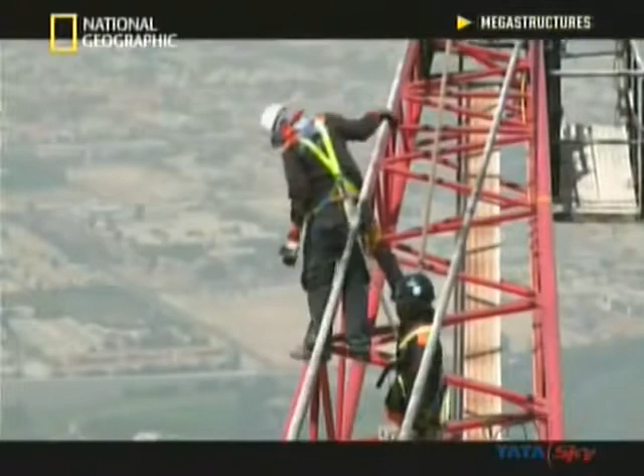The Burj Khalifa in Dubai is the tallest man-made feature on the face of the planet, and one of the greatest achievements in engineering history. To dream it up took outrageous ambition. To put it together requires nerves of steel.

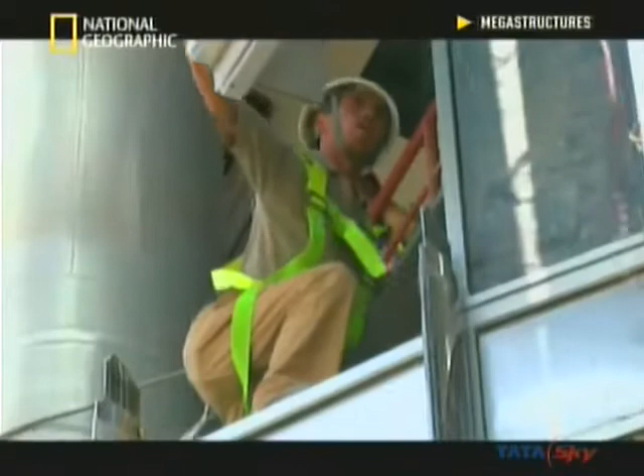Constructing cranes taller. Installing windows higher. Up! And building bigger than ever before. The immediate reaction was, "Are you crazy?" As the construction team makes history, they film it themselves. This is the story of one incredible skyscraper, and the people risking their reputations and their lives to build it. All these people that are underneath this are at risk.

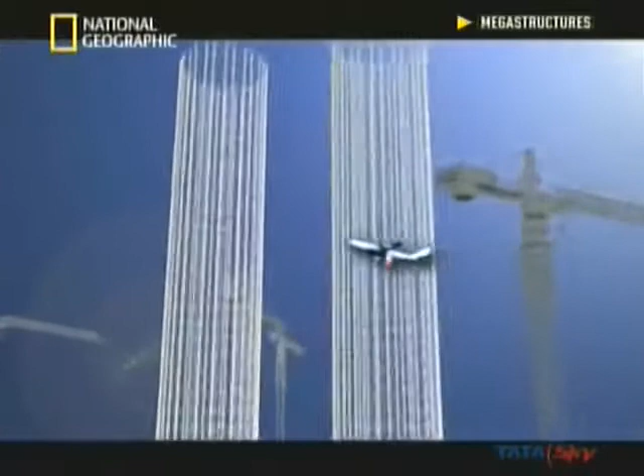In the Middle Eastern Emirate of Dubai stands an architectural giant. At 828 meters high, the Burj Khalifa is the tallest building on Earth. This $1.5 billion tower opened in 2010 with one of the most spectacular fireworks displays ever seen. But this patch of land once looked very different. 6 years earlier, when construction started, it was little more than a barren, parched, and sun-baked desert.

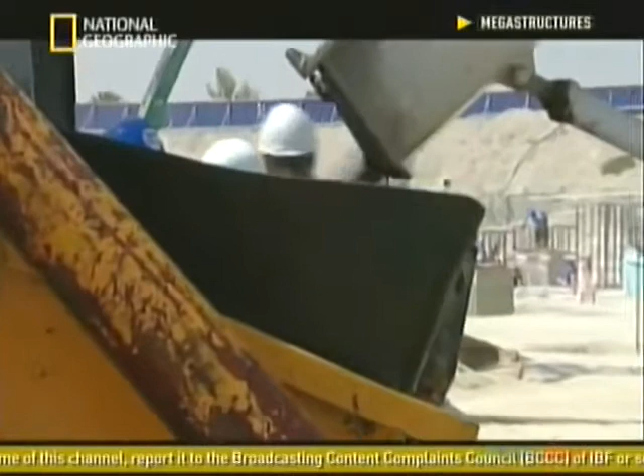In February 2004, the team breaks ground at the Burj site. When you build this big, speed is of the essence. Time is money. There's so much money invested in these buildings, you have to finish them and start recouping your investment. Construction manager David Bradford is the man responsible for getting the job done on time.

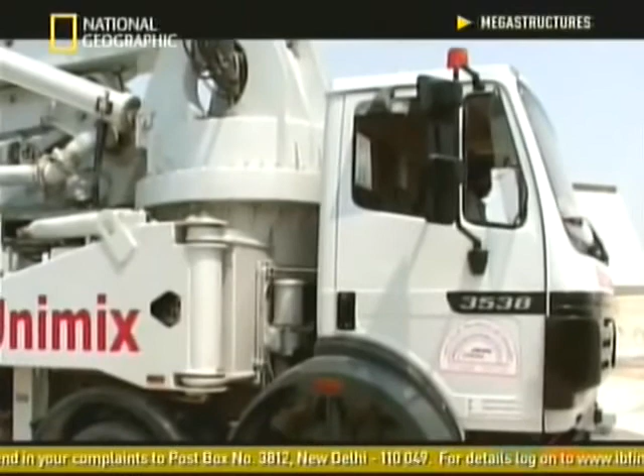So I was ecstatic, just to get a job like this. It's like a dream come true. This is the biggest building in the world. How many people get an opportunity to work on a job like this?

But as David starts work, the architects are still finalizing the tower's complex design. The way you build a building like this, you have to fast-track it. So you can't wait until you get all the design in place. You'll be sitting there in your office for 3 years trying to get the design finished before you can tender it. With large parts of the structure still on the drawing board, the construction team heads into the sky.

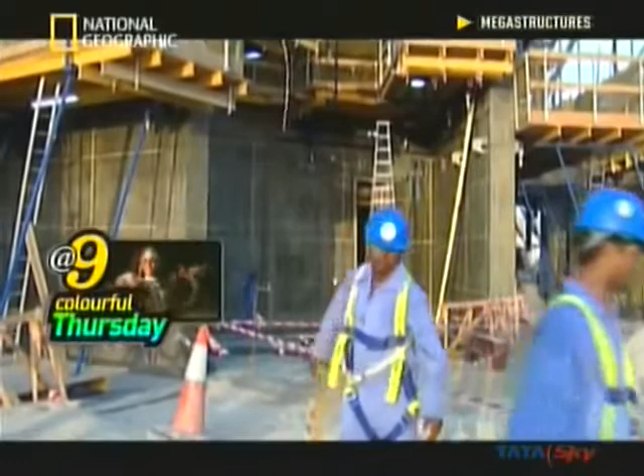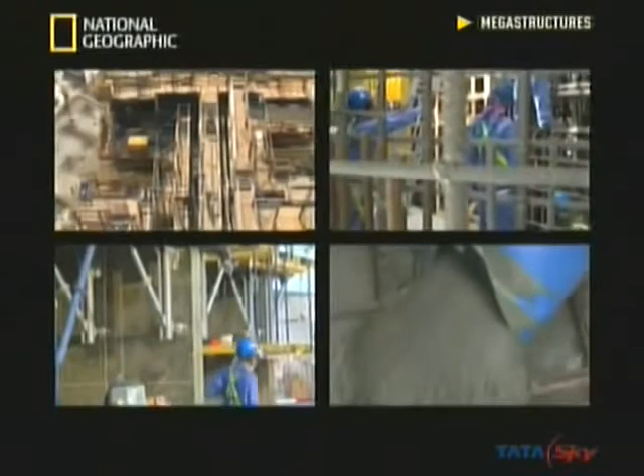The fastest way to build a tower like the Burj is with reinforced concrete, using a process called jump forming. The team builds molds at the base. They insert steel reinforcement bars and pour in concrete. Then when the concrete sets, the team lifts the molds up to the next level. And the process starts again. Using this system, the building begins growing at the pace of one new floor every week.

When you set the jump form up like this, you put the rebar in, you pour the concrete in the top. After 12 hours, this is 12 hours after you place the concrete, which is liquid, you pull the forms back and you actually climb the hydraulic jump form system up on the concrete that was previously poured. And then that climbs up automatically 4 meters at a time.

The Burj Khalifa is the brainchild of Dubai property developer Emaar. They want to proclaim the city's growing status as a global financial center by building the world's tallest tower. So Emaar has called in one of America's top architecture firms, Skidmore, Owings and Merrill. SOM is based in Chicago, the home of the skyscraper.

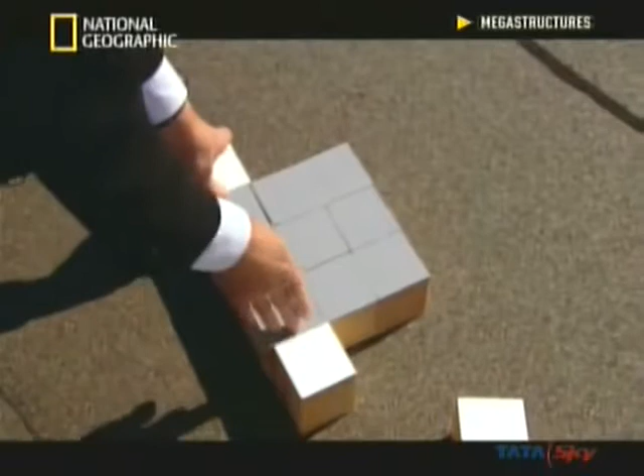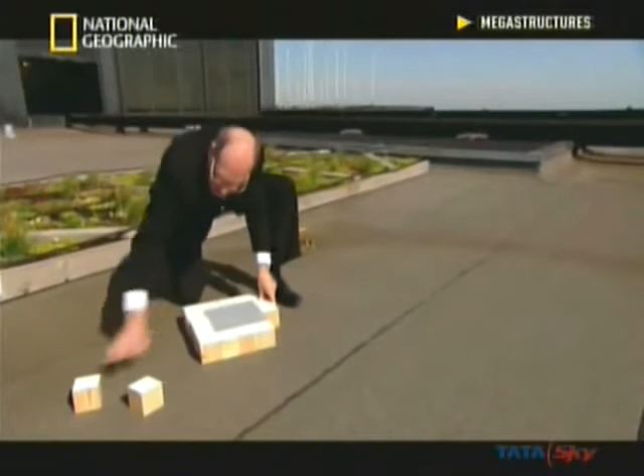Well, you got to make the footprint bigger. But as we do this, we've gone from something that was 3 wide to something that's 5 wide. So you have a huge amount of area, which is difficult to market. And what's more important is that the space becomes very, very deep. In buildings, you want to have views. You want to be able to see out the window. And you can see your occupants would be so far from the views from the skin as to render the building unusable.

To create a taller tower with bright internal spaces, Bill and his team devise a new structural system. The structural system we use for the Burj Khalifa is the buttressed core. Now the core is the center hexagon in the middle of the building, and that's what's used to resist the twisting forces on the building, okay? But it's much too slender to go to such great heights. So it needs to be buttressed.

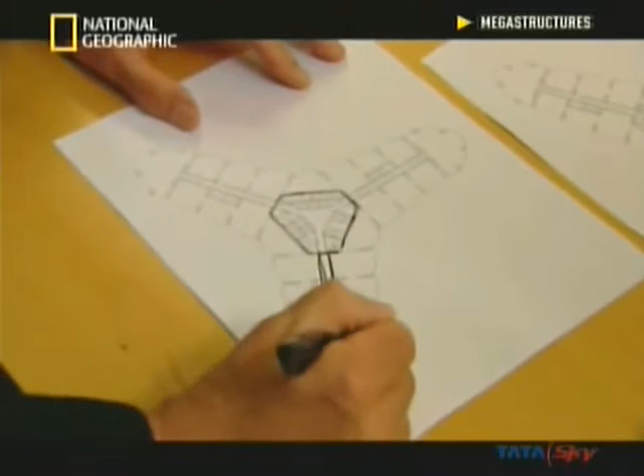Now the buttresses are the three wings that come off. It's consisting of these walls that go down the corridors. So you can see how this core has been buttressed in three directions. That's why the structure goes down the wings. To my knowledge, it's never been done anywhere else. And so it's a unique solution to a very interesting problem.

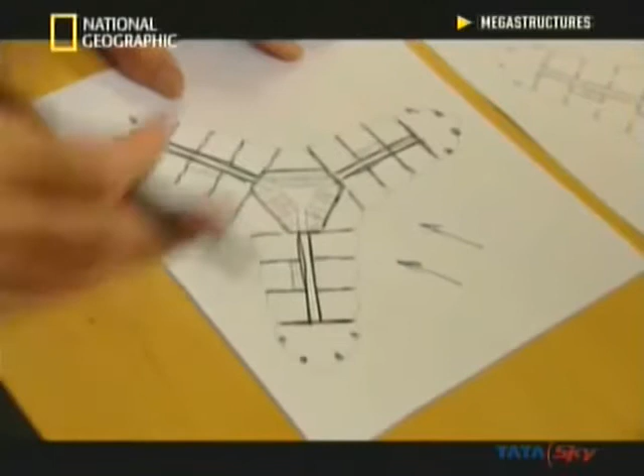With the buttressed core concept, natural light floods the interior. We've come up with a solution which allows us to go very, very tall, but it's light and airy on the inside. It's as if you're in a 10-story building rather than a 160-story building. In SOM's design, the large tower base helps support the huge weight of steel and concrete. Then, as the building climbs, the buttresses step back in a rising spiral.

The team then coats the design in glistening mirrored glass to reflect the desert heat and light. If you were to compare the Burj to an automobile, you'd be talking about Lamborghinis or Ferraris. It's all about performance, and this building is at the highest level of performance. This quality comes at a price.

The building cost was a closely guarded secret. We heard some general figures that were thrown out. We guessed that it was somewhere in the $1.5 billion range, but we weren't privy to a lot of that information. And again, I think the jury's still out. Making this billion-dollar design a reality will be a mammoth task.

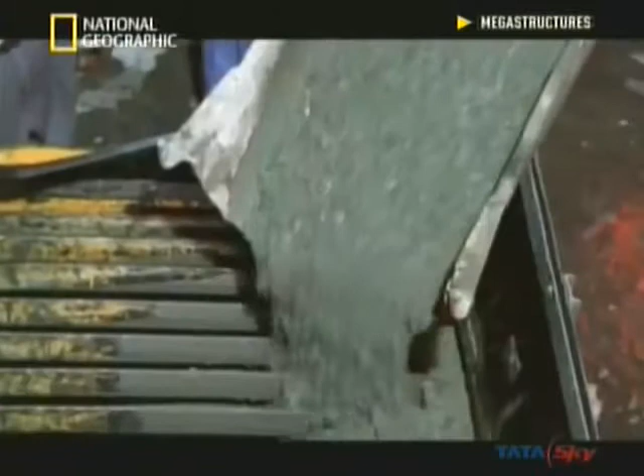The most basic construction materials must be super-powered. Strength of concrete was key here, absolutely key. And we produced concrete here that nobody produced anywhere else. The team uses over 25 separate ingredients to create concrete that stays liquid as it's pumped up the building and then turns solid extremely fast.

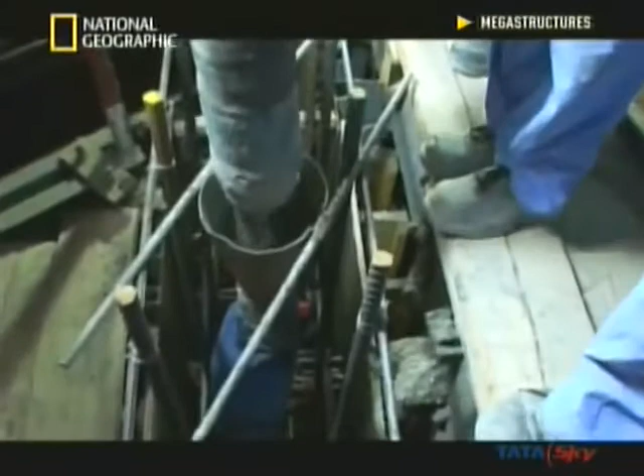But getting this special mix to set is a massive challenge in Dubai, with temperatures rising over 45 degrees Celsius. If the concrete is too hot, it'll set instantaneously and you can't even place it. You have to pour at night when the temperatures are lower, and you have to put in ice and chilled water in the concrete mix.

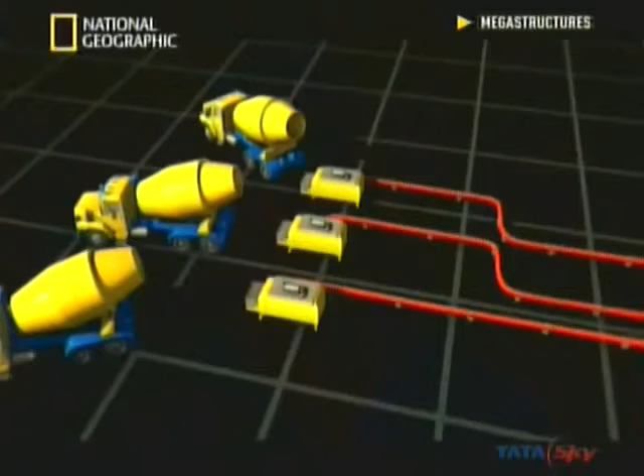To lift this mix up the building, the construction team uses three of the world's most powerful concrete pumps. Over 32 months, the pumps deliver 165,000 cubic meters of concrete, enough to lay a sidewalk 880 kilometers long. The team will then top the concrete tower with structural steel. And as this building rockets out of the desert, men and machinery will go to greater heights than ever seen before. Okay, over the edge.

The city of Dubai is home to 17 of the 100 highest skyscrapers on Earth. But they're about to be dwarfed by a monster. As construction accelerates, the Burj Khalifa is now growing a new floor every three days. The idea is keep the ball rolling, never stop construction at any point in the project until you're finished. The building's handed over, that's it. That's when you can relax.

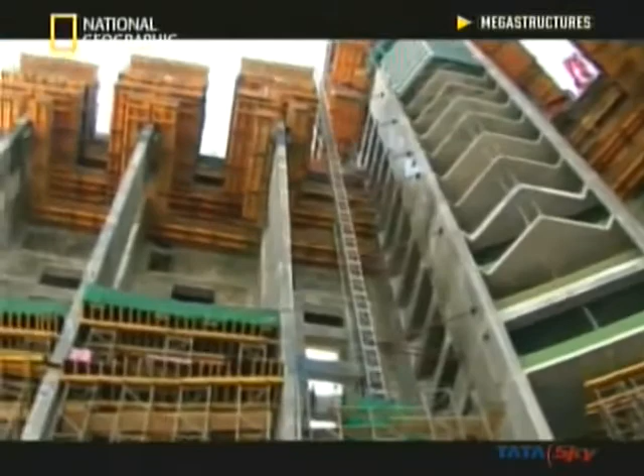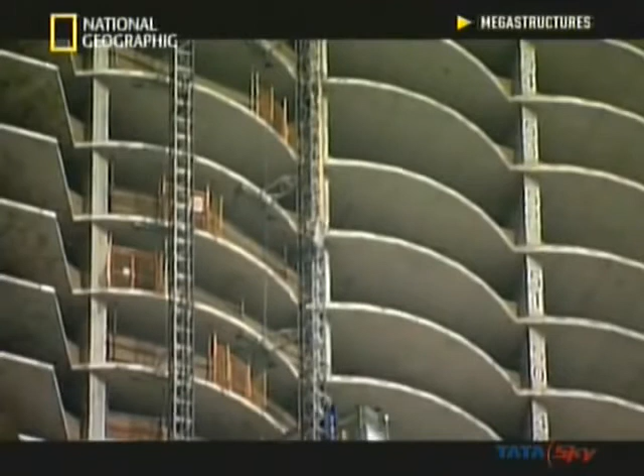While this process continues, there is still one fundamental detail to resolve. The architects still haven't decided on the building's final height. Usually minor things change, and on this one, major things changed. The foundations went in way before we figured out the final height of this building. It's an issue that has to be cleared up, fast.

The landmark to beat is the 508-meter tall Taipei 101 in Taiwan. SOM's original design is just 10 meters higher. And one of the reasons why we did that is we didn't want to promise more than we knew we could deliver. But the architects soon calculate that the structure is so strong, it could stand over 300 meters taller.

We kept on making the building taller and taller. And so it actually grew to about 725 meters there for a while. It stayed there for a while, then eventually grew up to around 800 meters and finally ended up at the 828 meter height.

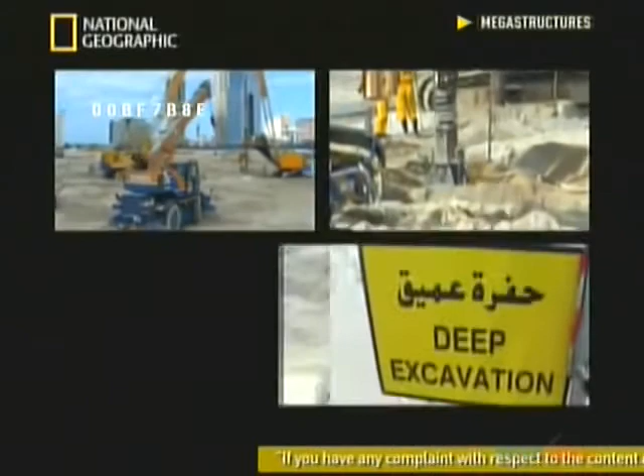When complete, the Burj will stand 828 meters above the ground. The question is, are the foundations strong enough to hold it up? Early on in construction, analysis of the ground under the site highlighted a problem.

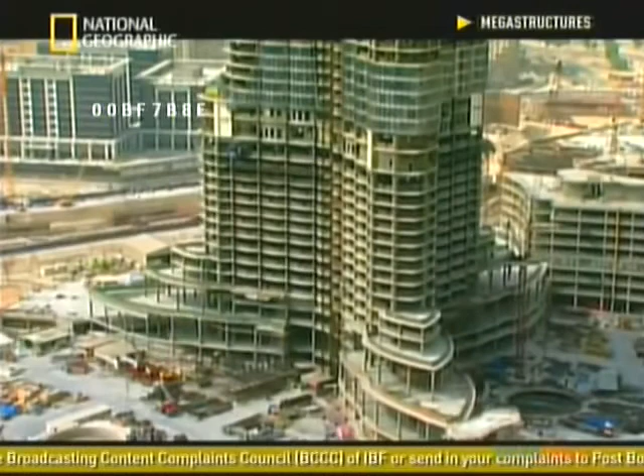It's not like when I worked in New York City, you get good granite there. You go down 4 or 5 meters, you're into good granite, and that's what you sit your foundation on, the granite itself. Here the ground is a top layer of sand, 3 or 4 meters of sand, and you get into weak sandstones, weak limestones, nothing very good.

But science provides the answer. The future of the Burj Khalifa and its entire colossal weight rests on one scientific principle: friction. There's basically 2 methods in piling. One is end-bearing piles, which is you put the pile directly on the hard rock. That's what can sustain the load.

But here we went with skin friction piles, where the weight of the tower is carried on the friction of the pile, the side of the pile. The foundations of the Burj rely on the super strong grip created between the ground and the sides of each pile. Beneath the tower, the team has driven 192 piles to a depth of 50 meters to support a 3.7 meter thick raft of solid concrete.

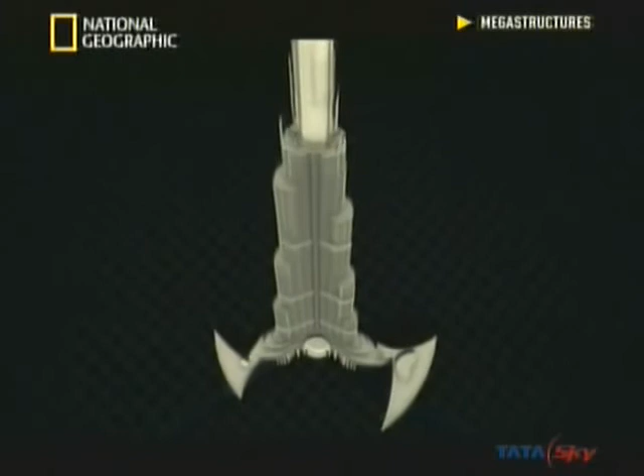These foundations must hold up a building that weighs over 500,000 tons. The numbers are so big that the team has to allow for a small degree of settling in the design. Once we evaluate all the total load of the building, live and dead loads, we expect the foundations to settle about 75 millimeters. But the foundations should hold.

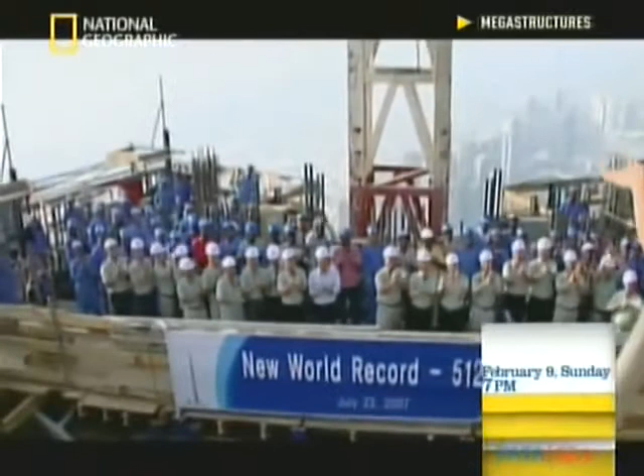3 years after breaking ground, construction reaches 512 meters and 141 floors. The Burj is now the tallest building on Earth. To help move materials, the team hires 3 of the biggest construction cranes in the world. I mean, these are very specialist cranes, actually huge. They weigh 120 tons dead weight. That's the crane itself, without anything on the hook.

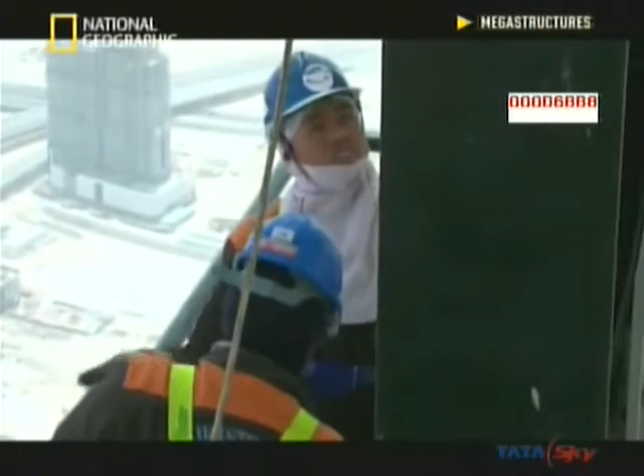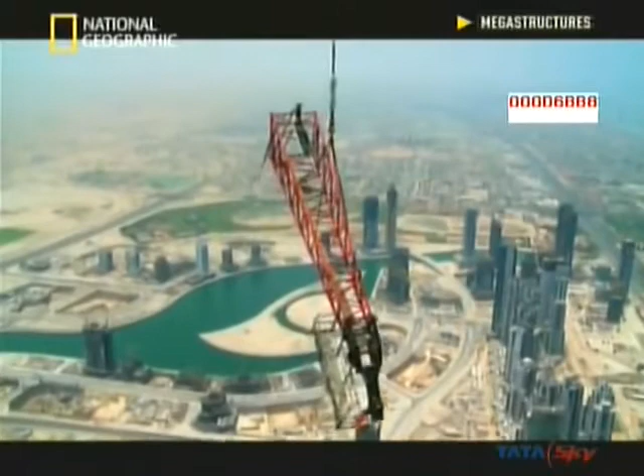The high-wire act of installing the cranes falls to a special group of men: Sharif and his team of crane riggers. These men come from every part of the globe, and many speak different languages. But they have 2 things in common: a strong nerve and an incredible head for heights. Their task is to erect the cranes and keep them working smoothly, all without a single slip.

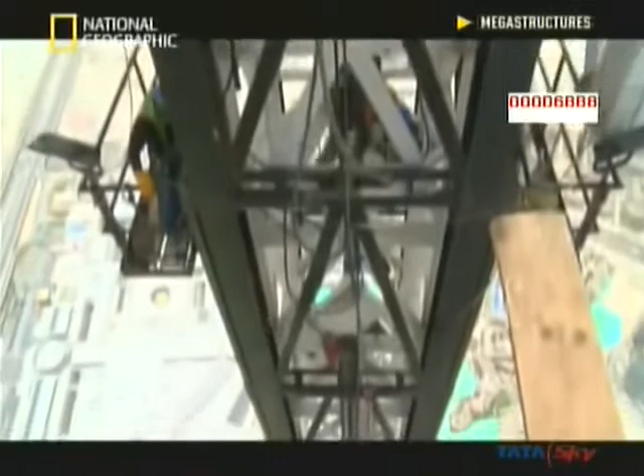They never ever lost sight of the ground and the edge of the building, and it was amazing that these people were so comfortable. The cranes contain an ingenious self-jacking mechanism, so they can grow alongside the rising building. As every new floor is completed, Sharif and his team add another section to the tower support and lift each crane even higher.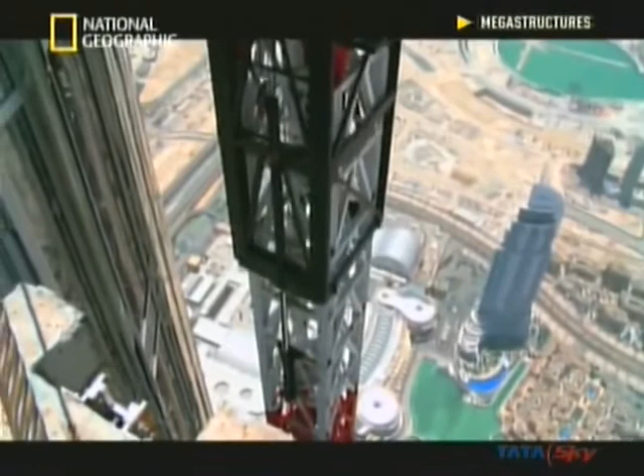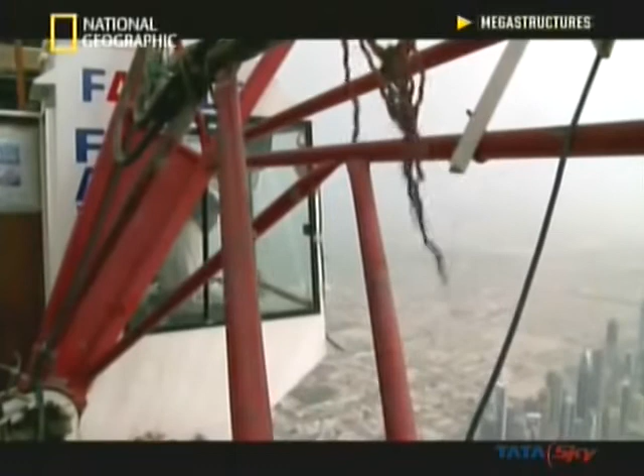You need a steady hand to operate the highest construction crane in the world. And one of the few trusted with the task is Mohammed from Pakistan. I'm on duty for 12 hours, from 7 in the morning until 7 in the evening. There was a myth going around that the crane operator lived in the cabin, but I think the cabins are too cramped and uncomfortable. At 700 meters up in the air, Mohammed's crane cab is nearly twice as high as the Empire State Building.

I like heights. They're great for work. If I need to go higher, that's fine. Whatever the height is, God willing, I'll do it. As the Burj reaches for the sky, it is entering the unknown. And one powerful force is becoming an increasing threat.

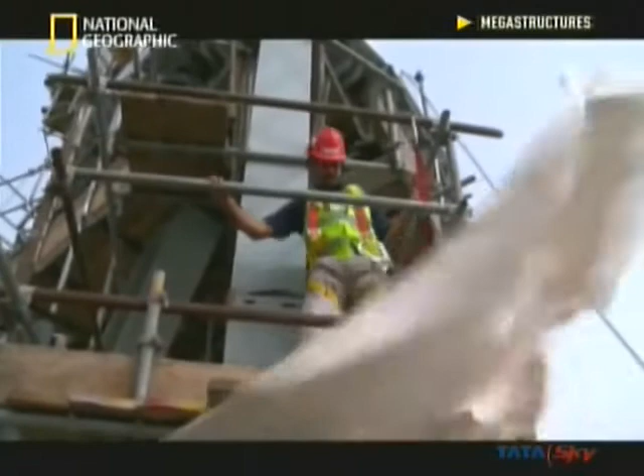The first overarching thing is you have to be respectful of the laws of nature, with gravity, wind, and the sun. And on a super high rise, the most dangerous and unpredictable of these elements is wind. And when you get to these heights, the dominant load is actually wind load.

It's not dead load, which is actually the weight of the structure and the cladding and so forth. It's not live load, which is the people in the building. That's fairly small. It's actually wind load. You get the wind blowing on the side of the tower, and of course it tends to bend the tower or try to push it over.

No building demonstrates this problem better than the John Hancock Tower in Boston. A masterpiece of steel and glass, 240 meters tall, the Hancock was constructed in the 1970s. But serious problems soon emerged. Even in moderate winds, people inside suffered motion sickness as the building swayed. And over 5,000 glass panels blew out, shattering on the sidewalk below. Only a major redesign saved the tower from demolition.

To prevent the Burj from suffering a similar fate, the team tests the building in a wind tunnel. Peter Irwin is one of the world's top wind engineers. These are various models of different buildings that we've tested in the past. This one here shows some of the unusual shapes that architects are coming up with. That one's being built in China.

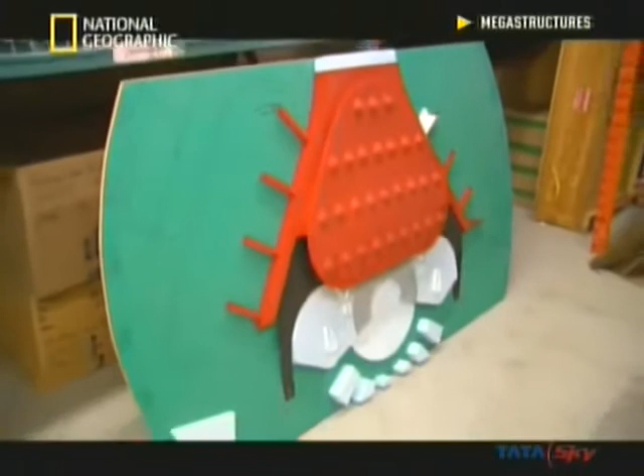When we get involved with a wind engineering project, there are 2 aspects that we need to address. First of all, we need to know what are the winds doing in the area that the building is going to be built. Then we also need to know what is it going to do to the building. Peter and the team calculate that the Burj has to withstand gusts of up to 240 kilometers per hour.

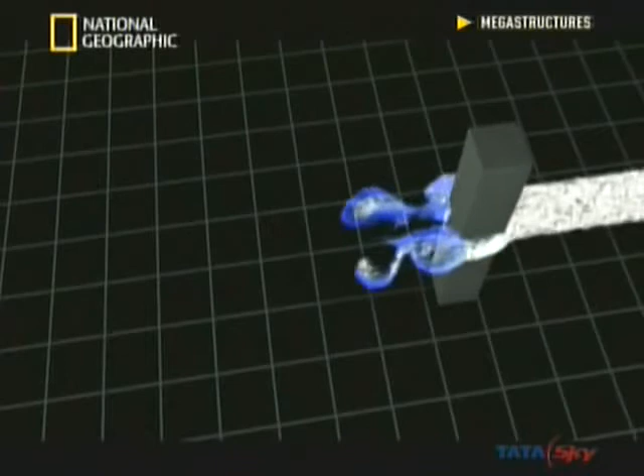But because of its height, this tower faces an added danger. Buildings, as they get taller and more slender, run into a particular phenomenon in wind called vortex shedding. This is a model of a tall building, and the wind is blowing this way. And what happens with a building like this is that you get vortices peeling off this front corner, first off one side and then off the other side. As these whirlwinds peel off each side of a skyscraper, they can pull the building violently from side to side. Peter and the team must make sure that this phenomenon doesn't damage the Burj.

There were 3 aerodynamic improvements that were developed as a result of the wind tunnel test. One of them was to improve the shape of these outer buttresses by softening the corner here. Another one was to reduce the width of the tower higher up. And a third improvement was achieved by reorienting the entire tower relative to the prevailing wind directions. The end result is an incredibly stable building, with a shape that resists vortex shedding. So you might say that this shape confuses the wind and it's unable to create these strong crosswind forces that affect many other buildings. The Burj is equipped to handle the strongest winds that strike Dubai.

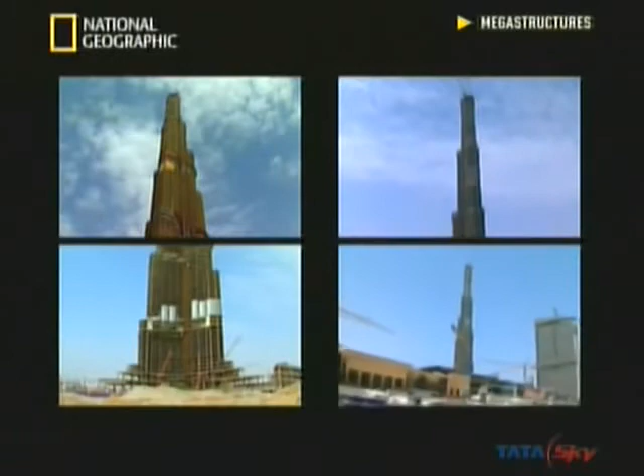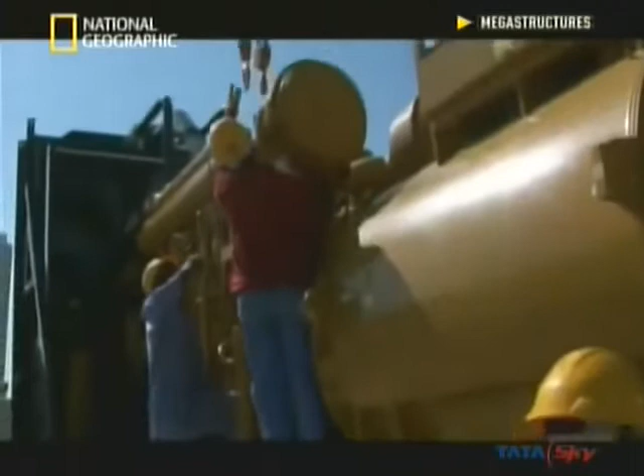On site, the superstructure is shooting upwards. Once completed, the Burj Khalifa will contain 900 apartments, a 160-room hotel, and 37 floors of offices. The building will use up to 36 megawatts of electricity, enough to power a town of 20,000 people. In a power outage, 5 huge generators will supply backup electricity. But first, someone has to get these massive machines into position.

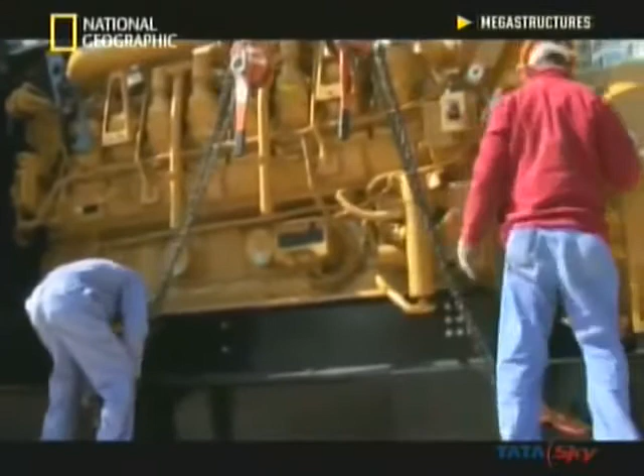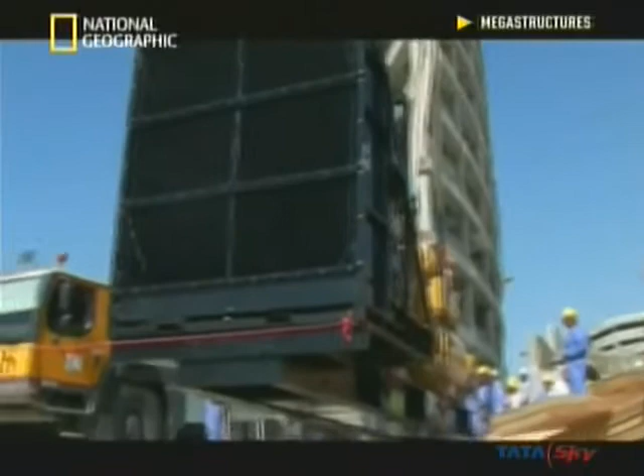3 days before Christmas Day, and look what Santa's brought me. That's a 22-ton generator, and there's 5 of them. Pull it. Gently. Keep your eyes on the machine. What have we got? 26. It's supposed to be 22. Someone, somewhere, has made a critical mistake. Each generator should weigh 22 tons. Why is it 26 tons?

You're amazing. Amazing. Everything is rated below 25 tons. The spreader beam is rated until 25 tons. All these slings, they're 6 tons each, that's 24 tons, and we're trying to lift 26 tons. Therefore, all these people that are underneath this are at risk. Why is that? Right now, my people are at risk. Yes. It's 26 tons. The generator is 4 tons too heavy, and the chains could snap at any moment.

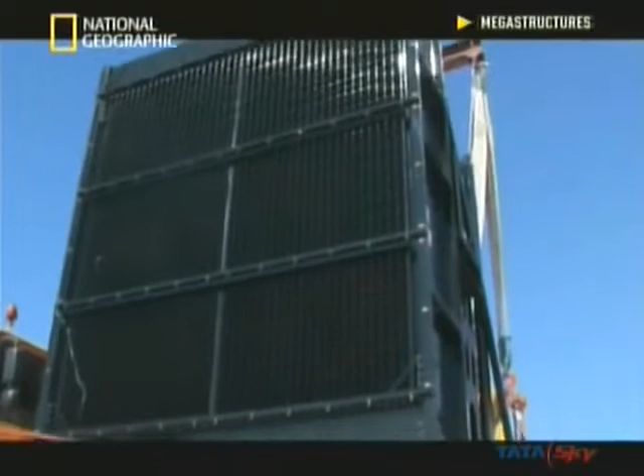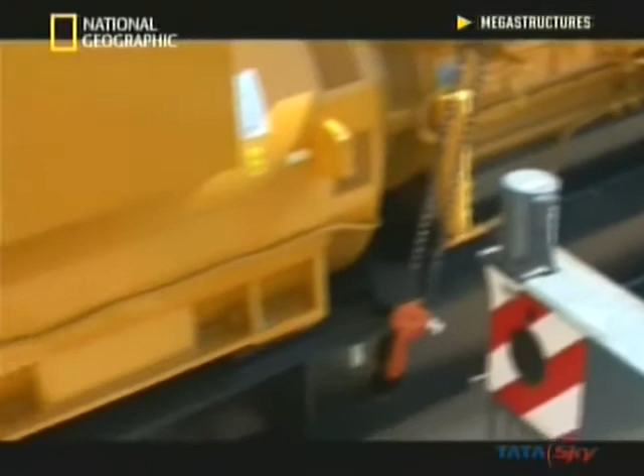Put it down. These things are not an exact science. It's experience, and I'd sooner not risk the lives of men or machines. When you're building on this scale, safety is paramount. The team must reinforce the lifting gear before moving the generators into the building. You go downside, huh?

As work progresses, the task of keeping everything on schedule is taking its toll on David Bradford. I went all out here to produce the best job possible. That had an impact, obviously, on my family life. My wife didn't see me, although she didn't complain about it, but I'd show up home and my wife had already gone to bed, and I'd be out in the morning before she got up. But the job's just about to get even tougher.

It's kind of a building you can't afford to make mistakes. Okay. That's the bottom line. You make a mistake, the building stops, then everybody incurs huge costs. The contractor's got all his plant and equipment lying idle. He's got thousands of workmen out of work, basically. Can't afford mistakes. You have to check, double check. Everything has to be more or less perfect, all the way up the building. And with the superstructure almost done, one thing is less than perfect. The glass panels that should already cover most of the building are still nowhere in sight.

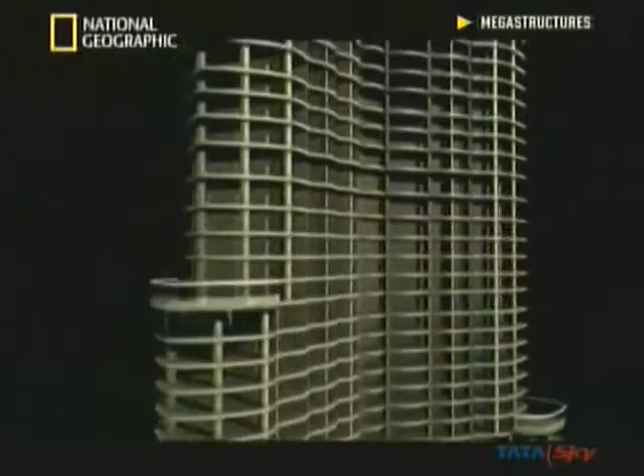As the finished shape of the Burj Khalifa begins to emerge from Dubai's desert haze, the team urgently needs to start cladding the building in its steel and glass facade. As the construction drives upward, you need the cladding to enclose the building, create an interior environment where you can actually work inside and do fit out and mechanical work. All the kinds of things that make the building habitable need an enclosure. It is a massive task to seal the structure from wind, rain and sand.

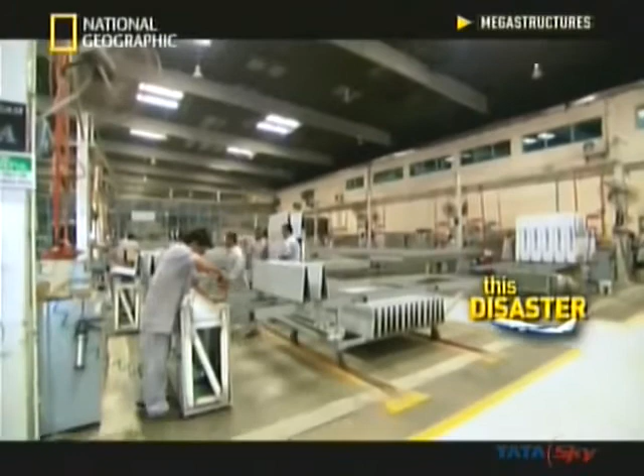24,348 individual panels must be assembled and installed on the exterior. But the company commissioned to supply the panels has gone bust. Now the building is in danger of going over schedule and over budget. Every idle day, every decision that is not made, costs somebody a lot of money. Local contractor Arabian Aluminium brings a new panel supplier on board. And they track down a problem solver to kick-start the operation.

I hopped on a plane, arrived in Dubai for the interview and was taken to the job site. And he said, well, this is the job and this is what you're going to be doing. And I looked up and I said, wow. He goes, yeah, it's not even halfway there. So big surprise. And I said, well, where's the windows? He said, well, this is a problem. There is no curtain walling. There's no design. We don't have a system. I said, well, this is a job for me then. I can fix this problem.

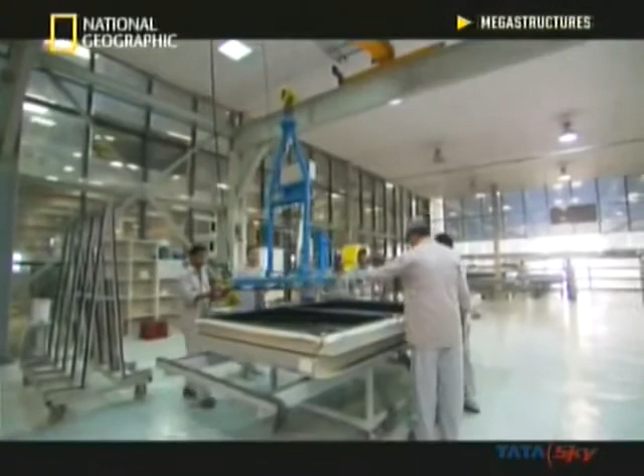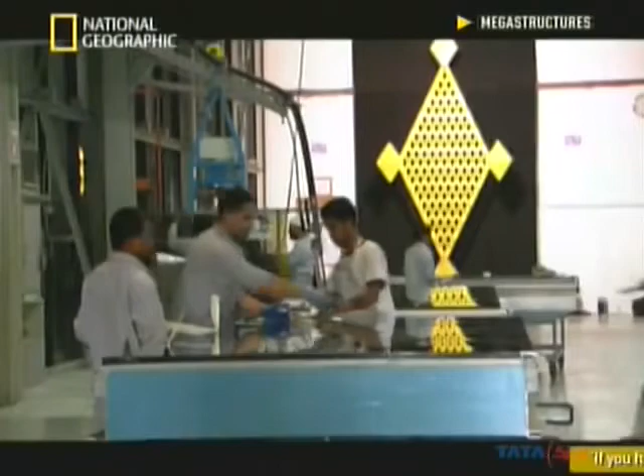Construction of the facade is now 18 months behind schedule. To put the build back on track, John Zarafa helped set up a brand new factory devoted entirely to the Burj. I thought, yeah, it's going to be difficult, but it's a challenge. We were fairly amazed because they went from appointment of their new contract through design, through production of the components and ready for testing in a space of 4 months.

This is a typical panel that was used on the Burj, basically with a big piece of vision glass, small vision glass, stainless steel spandrel, vertical bullnose. It's a stainless steel fin, it's mirror finish, which at the moment has got protection on it, which will eventually get taken off. These panels are literally lifted up as a complete unit and they're hung. That's why they call it a curtain wall. It's actually hanging from the slab above.

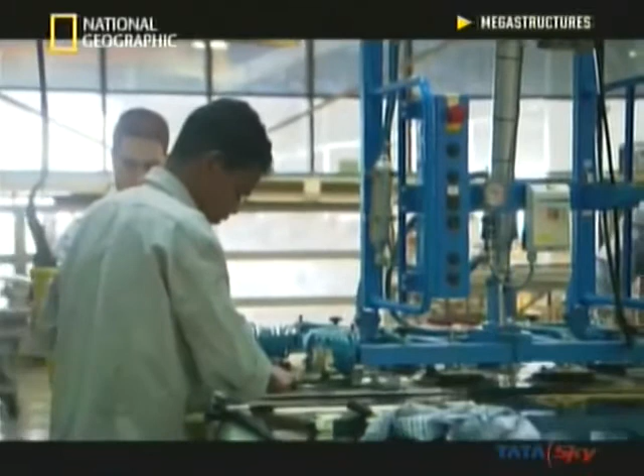Covering buildings in glass might look good, but in Dubai, this creates a special challenge, as John demonstrates. We've got a piece of clear glass here, just normal glass. The sensors are measuring the temperature in the box to understand how much heat is transferring through the glass and into the box. So if this was on the building, this is the amount of heat that would transfer through the glass and into the building. The outside temperature is now reading 46 degrees Celsius, which is very, very hot. As you can see, we're having a bit of a sweat.

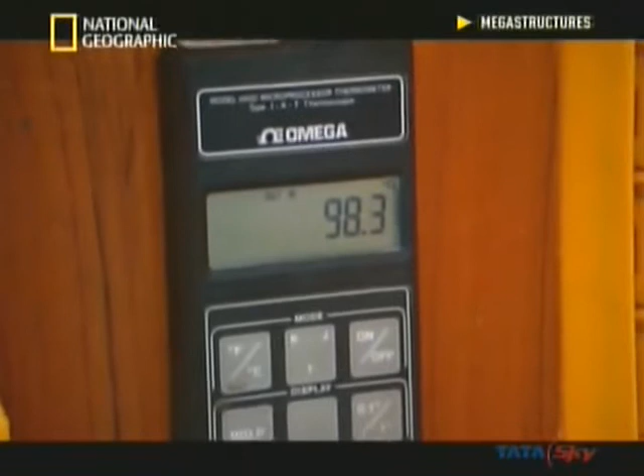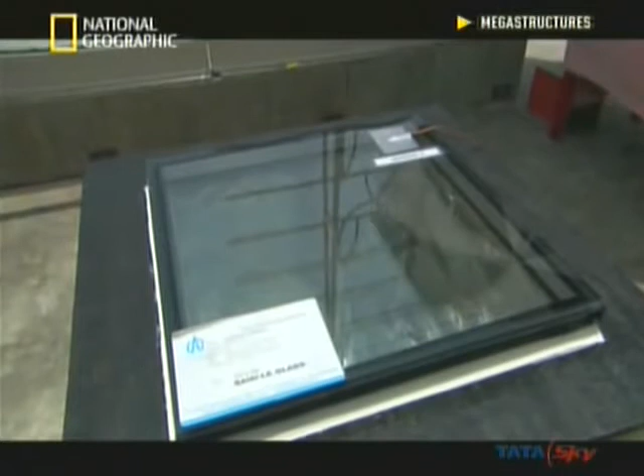46 degrees Celsius is high, but that's nothing compared to the temperature under the glass. The current temperature inside the clear glass box is reading 98 degrees Celsius, so not too many human beings that I know could actually live in this environment. The internal temperature is just below boiling point. If this ordinary glass were installed in the Burj, the building's interior could become the world's biggest sauna. But the team has a high-tech solution.

Here we've got the glass for the Burj Khalifa, which has 2 coatings on it. The outside coating is a silver coating, which captures the UV rays and reflects them back out of the building. The inside coating is a titanium coating, which captures the infrared rays. By reflecting infrared and UV rays, the glass drastically reduces the amount of heat that penetrates the building.

But this technology comes at a cost. With everything that is involved with making a panel, to the point of bringing it to the site and installing it, you're probably talking close to $2,000 US a panel, times 24,000 panels, it's a lot of money. So 24,000 times 2,000 is 48 million. As the glass and aluminium arrive in Dubai, factory workers assemble the panels and ship them straight to the building site.

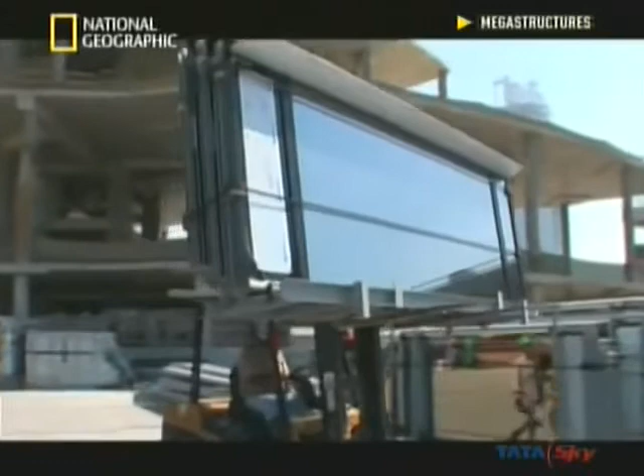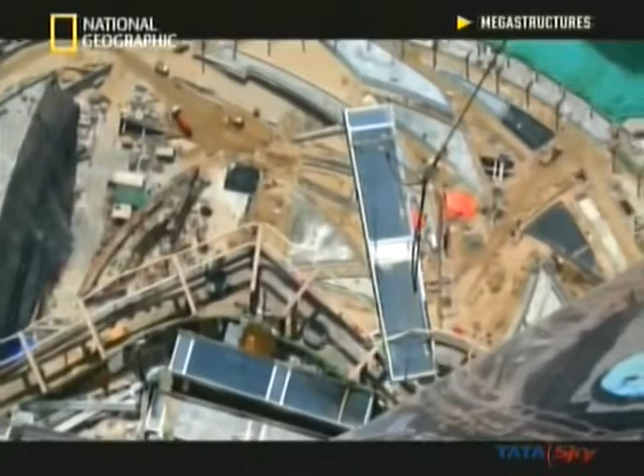The panels are up to 6.4 meters long and weigh up to 750 kilograms. And every single one must be lifted individually and installed by hand. It's very dangerous. You can imagine these panels are quite large, and as soon as the wind grabs them, they're like a big sail, so very difficult to control. The panel could go flying back into the building, the glass would break, and you're going to get a shower of glass coming down the building. A guy could get his legs cut open and stuff like that. It's quite dangerous.

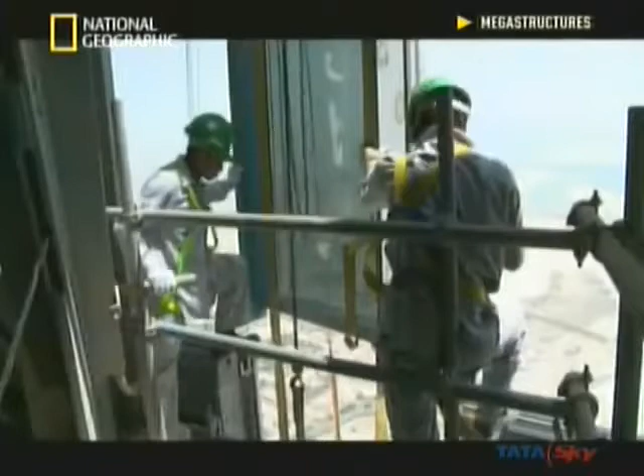As the workmen seal the building, no one is following progress closer than construction manager David Bradford. The major milestone, believe me, I've been working on this thing for a year now. It's been a nightmare. On a Friday, if I wasn't coming into work, I'd set my telescope up on the roof and spy on the cladding contractor and make sure he was working. If he wasn't, I'd give him a telephone call. Yeah, hey, what happened? You know, why aren't you working?

We actually recovered all the time that we needed to get the building back on track, which was really astounding that they were able to do this. The curtain wall is virtually finished. 5 years after breaking ground, the Burj is racing towards completion. On the outside of the building, one of its signature features is taking shape. The highest external balconies in the world.

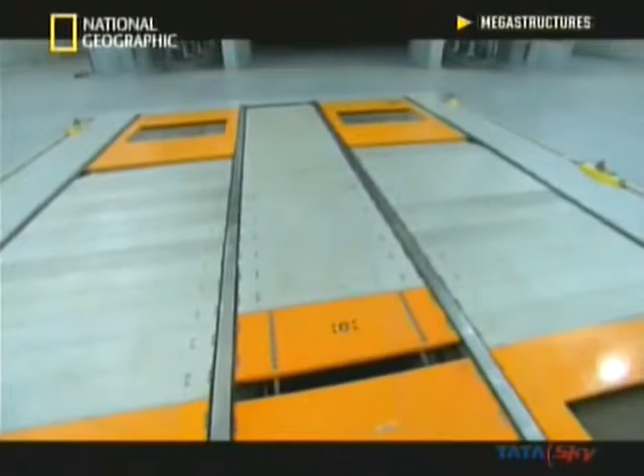It was a client suggestion, and my first thought was, you better bolt down the furniture. We'll head into the main control room. Wind engineer Peter Irwin has a simple way of demonstrating the problem. Using a state-of-the-art wind tunnel at the University of Western Ontario, run by engineer John Comar. The air is streaming through this side. It contracts right through this nozzle in a very uniform fashion and streams right into that corner number 1.

Okay. What we want to do today is to look at the effect of wind on people. We will presumably be able to have them harnessed down to be safe. We'll certainly strap them down and get them linked to the floor so they don't blow away. In Dubai, the Burj Khalifa might be hit by winds gusting up to 240 kilometers per hour. And this demonstration will show the effect of high winds if an ordinary person was standing on an unprotected balcony.

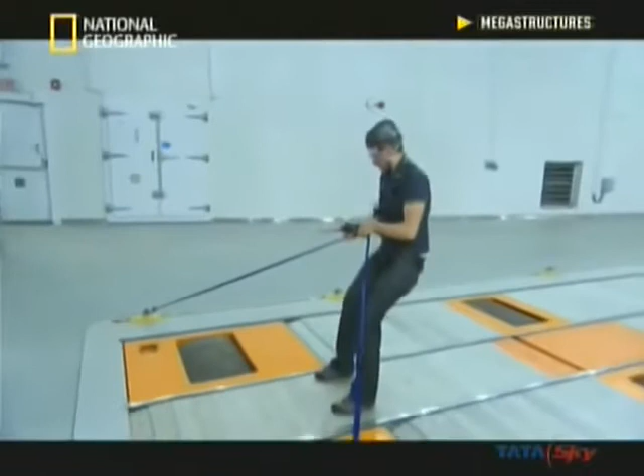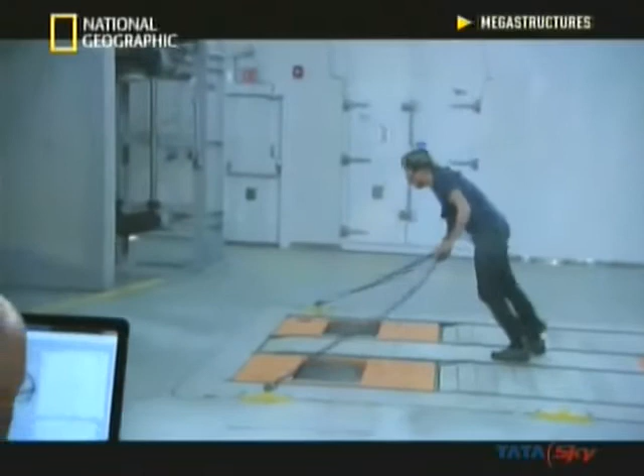Okay, we're turning on the wind, Simon. It's going to go up to 80 miles an hour, so get ready. Okay. Trouble. 130 kilometers per hour is equivalent to a Category 1 hurricane. Could you try and take 1 or 2 steps forward? Okay, thank you. That's enough. What would it be like to be on a balcony in that kind of wind at 120 stories?

To prevent people being blown off the Burj Khalifa, the architects developed ways to protect balcony users from the wind. We came up with these glazed balustrades which keep the wind from blowing straight through across the balcony terraces. We came up with these architectural dividers which keep the wind from coming over the balustrades and sweeping across the surface of the terraces. And we created these trellises which stop the downdrafts from pushing down over the tops of each terrace. But inside is the most ingenious solution.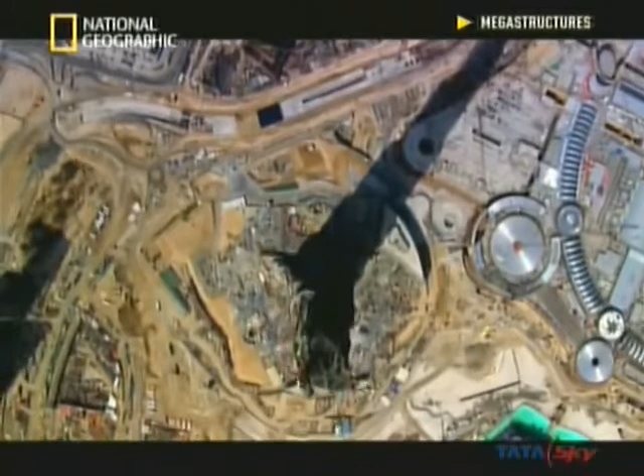Well, we have wind alarms installed on every facade where there's a terrace. So if the wind speed on the terrace exceeds what we consider to be safe for the occupants, there will be an alarm that goes off to warn people not to use the terrace at that particular moment. Meanwhile, further up, the building has yet to reach its final height. The construction team must crown the structure with one of the most extraordinary pieces of engineering ever attempted. A 136-meter tall steel pipe, weighing over 350 tons and measuring just 1.2 meters across at the very top.

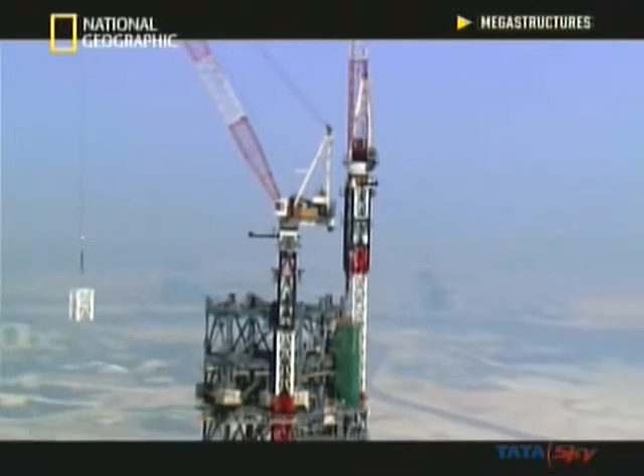The spire, to us, seemed to be the culmination of the building. How do you take this tapering tower and end it? If you chopped it off, it would look truncated. So we thought it had to stretch all the way up into the sky. But there's a huge problem. How to lift the spire and place it on top of the building. The thing is that we couldn't get the crane high enough up to set the spire. Even with the crane at maximum boom height, it couldn't get anywhere near the top of the spire.

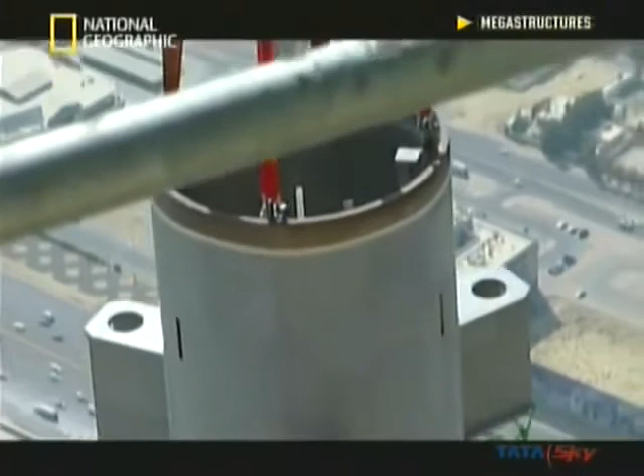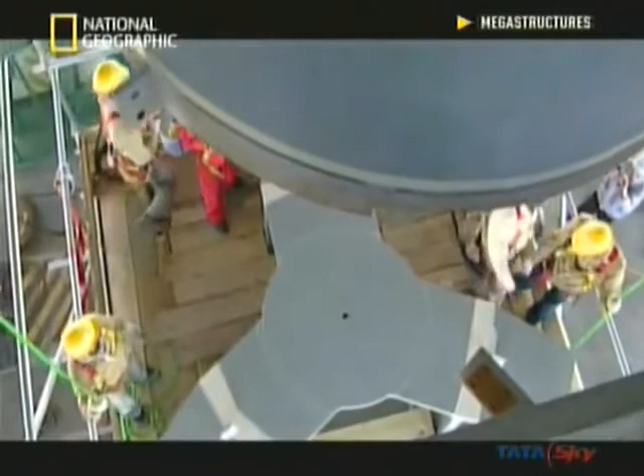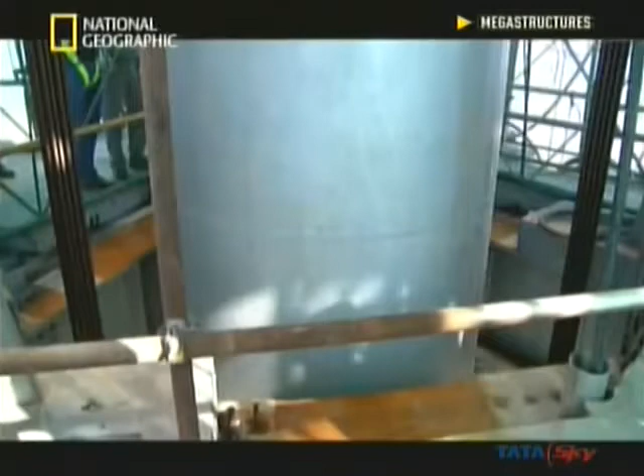No crane in the world can handle this job, and no helicopter can lift 350 tons of steel. It seems the spire is too big, and its destination too high. But then, an engineer suggests an ingenious solution. Lift the spire in pieces and assemble it inside the building. The spire was basically constructed inside the shaft of the building, and then using strand jacks, it was then jacked out of the building. All the lead architects and engineers gather to see the spire rise into its final position. Here we are for the last jacking of the spire to take it up to the top.

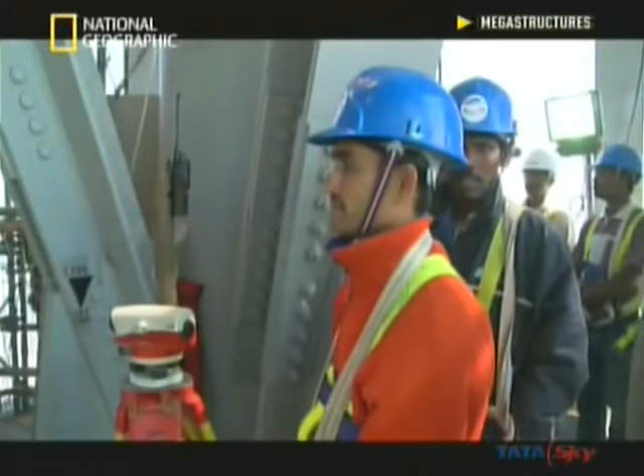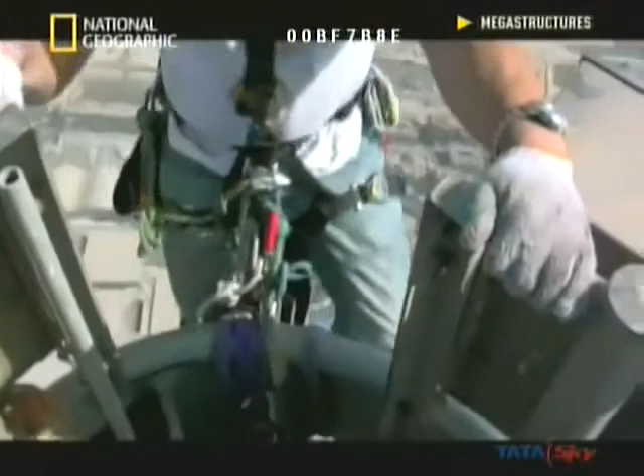It's a pretty nice moment to see this happen. For the first time, the silhouette of the Burj is complete. The team can now start to apply the finishing touches. This building doesn't just have to be the tallest in the world, it also has to be the best. And to make sure it's just that, some brave men are about to go to extraordinary heights.

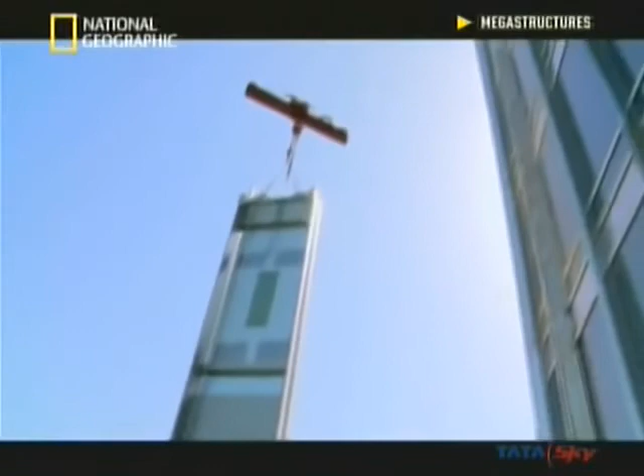It's a long way down here. Yes, sir. Long, long way down. After an incredible team effort, workers are finally installing the last curtain wall panel on the Burj Khalifa. The key to the job was the planning. We planned that whole thing down to the millimeter, down to the second.

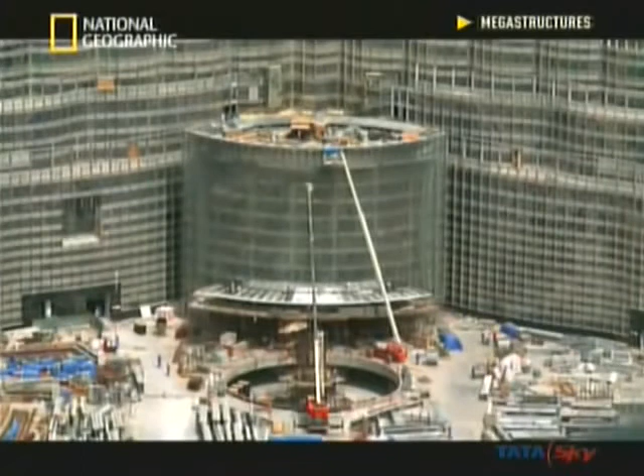The race is now on to finish the building before it opens in 3 months. After 6 years of construction, it's covered in dirt and dust. But there's a simple solution. Teams of window cleaners will polish the entire facade by hand and rope. All 24,348 panels.

800 meters up, there's one more job. After dark, the entire building will be illuminated by thousands of decorative lights. But at the tip of the spire, the last 7 lights still need to be installed. The scope of work was to cut 7 holes into the existing spire.

If it was me, I probably would have said, out of 2,000 lights, 7, forget about it. Standing on the ground, you're not going to notice. But Emaar wanted to do this job 100%. You know, they set their targets very high. The construction team must find a way to finish the job. You couldn't get a scaffold up there. The crane couldn't get that high.

Rope access expert Mick Flaherty has the answer. The immediate reaction was, are you crazy? How do you intend on doing this by hanging on a rope? Mick recruits a highly trained supervisor to lead the job. Now this is an abseiler. This is a guy that's worked in the rope access industry for many years.

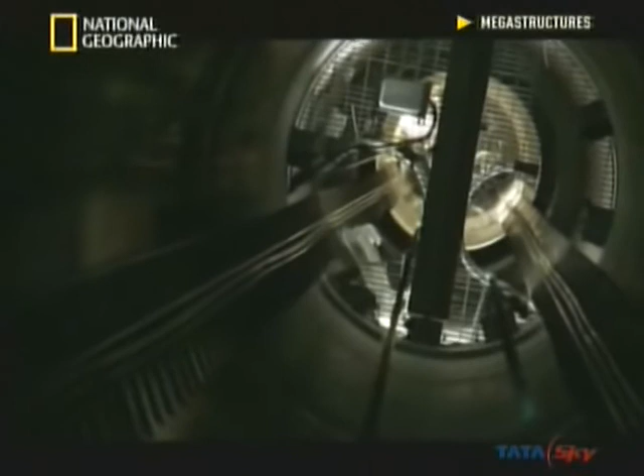But just before they're due to start, disaster strikes. At this height, it does something to you. You know, you're totally out of your limits. Making our way into the spire, I could see it in his eyes. He was concerned. He went white. He stops and he says, I'm sorry. I says, what's wrong? He says, I don't want to put my own life at risk. I can't do this job.

With no time left to find a replacement, there's only one solution. Mick has to lead the job himself. It's a highly dangerous task, in some of the toughest conditions imaginable. For me, it was the heat. It was the environment here in Dubai. It was a heavy construction job in an extreme environment. It's too dangerous and inaccessible for a TV crew. But Mick films it himself.

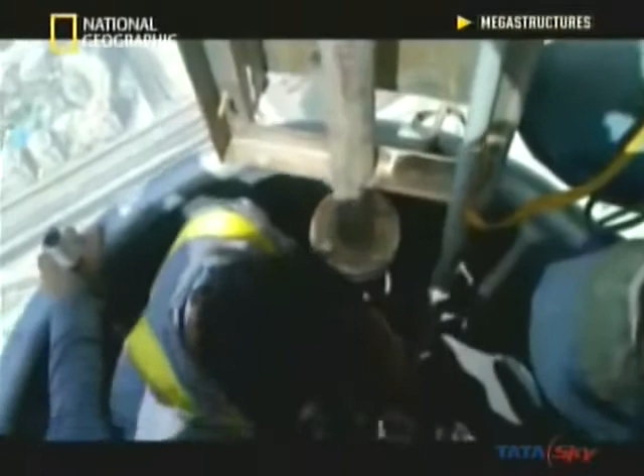First, inside the spire, the team cuts 7 holes in the 55mm thick steel. Woo! Oh, the back 7! Job very well done, Melcher. Yeah, thank you. Job very well done, Hector. Yeah. Woo!

He's going to get into position now. Then, Mick has to seal the lights in place from the outside. We got to the top of the spire and I rigged the job up and threw the rope, making sure I had knots on the end of them. This one's a serious one. Yeah. Okay? Very serious. You're all ready now? All ready, sir. Okay, over the edge. It's a long way down here. Yes, sir. A long, long way down.

You feel so high, you know? It doesn't feel real. Okay, Jamil? Yes, sir. All okay, sir. All right. Keep it there. That initial going over the side and doing the abseil, it was just a mega buzz. It was like, shall I look down or not? We've been cutting the hole with the steel. We've then been installing the light housing. And now we're going to finish by sealing. Automatic, yeah? Yes, sir. So that is the job complete.